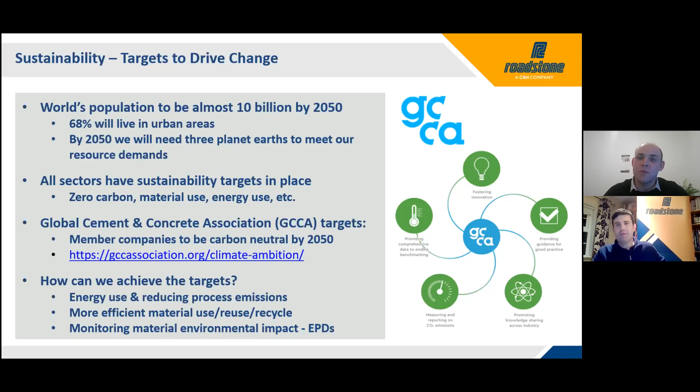And then to also achieve this, we need to monitor what our actual environmental impact is. We need to know of our products and the processes involved, what is the impact of them. For this, we can use EPDs, environmental product declarations.

So what are EPDs? They're a declaration of the life cycle analysis of a product, or the resource use indicators of that product. Unlike an eco label, which really just looks at the CO2 or the waste generation, the EPD covers everything. So it's your global warming, your CO2, your ozone, and then it's pretty much everything that's involved and the outputs of that material.

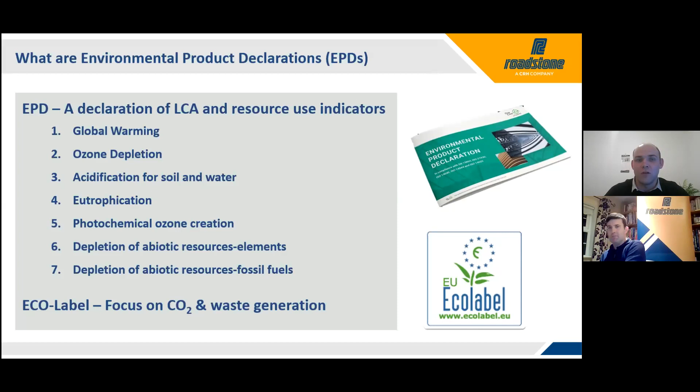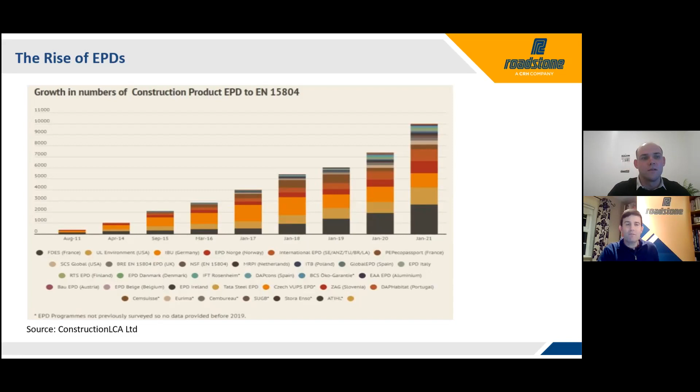So how do you actually go about developing an EPD? For the products you're looking at, you need to have 1 year's data collected. So you're looking at everything. So the materials that go into producing that product, the raw materials, the fuels involved in the processes, your electricity, the different energies you use, the waste you generate, the water you use.

And also now as well, you need to look at the life cycle in terms of the recarbonation during the life and then your wastes after life. Insignificant inputs aren't required, so the likes of where you're using reusable molds to create that product, you don't have to include them in your data. You use this data then to calculate your LCA.

Again, being a member of the GCCA, we have access to their EPD tool. There's also several other third-party EPD tools that can be used. So with these tools, they're set up that you input your data, and as long as your data input is correct, it calculates your full LCA for you.

You then have to engage with a third-party verifier and draft your EPD project report for the verifier. Typically then they might come back with some queries around your inputs and really ensure that your inputs are correct. Then you submit your EPD to the program operator for publication. So you're looking at your host platform. In Ireland, we have the Irish Green Building Council, the IGBC, which can act as a host platform, and there's also a European platform that can host your EPD.

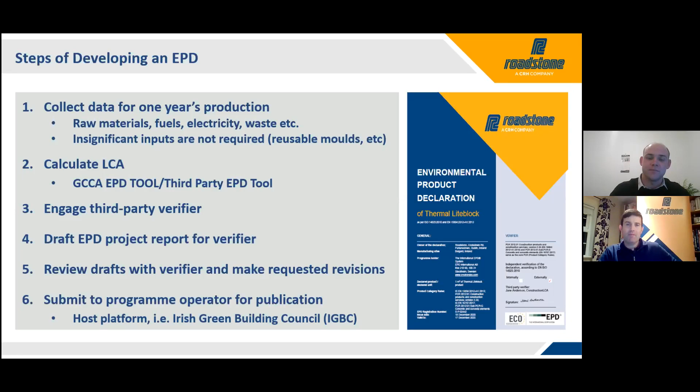Just a little bit more then on the life cycle stages required for the EPDs, what it actually is. So it's made up of 5 different stages. You've got A1 to A3, which is your product stage. So from a supplier's point of view, this is what we're concerned with. It's what we call the cradle to gate. So what's needed to produce that product and get it to our gate where it's ready to go to the customer. You then have the construction phase.

You have the operational phase, then C is the end of life stage, and then D, which is the loads beyond system boundaries. Up until 2019, to create your EPD, you just needed the cradle to gate, so the A1 to A3. Now you also have to include the end of life stage and the loads beyond the system boundary.

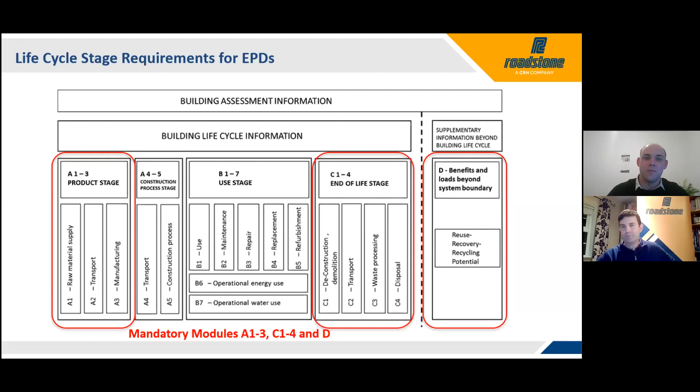Just looking at some of the key standards around creating EPDs, particularly those for cement and concrete. First of all, to create an EPD, you have to have a PCR. Your PCRs are your product category rules. And what they do is they ensure that when you're assessing or comparing two products of the same type of product from two different suppliers, that they were both assessed using the same method, that you're comparing apples to apples.

And to create an EPD, you have to have these PCRs in place. Well, they're well set up for the likes of cement and concrete. For other materials, the likes of asphalt or fill, there is still work on developing these PCRs, which will allow us to better develop our EPDs for the likes of asphalt and fill and other similar materials.

The key standard is EN 15804, which is your construction product PCR. You also then have 16908, which is for your cement and building lime, and 16757, which is for concrete and concrete elements. As I previously said, up to 2019, you just needed to have the product stage for EN 15804. This has now been revised.

It also includes a coexistence period of 3 years, and it also considers the end of life and the beyond system boundaries in the EPD calculation. There's also some additional mandatory indicators, such as the water use, the fossil fuels and gases associated with those, and how recarbonation is used during your operational phase and end of life for the product.

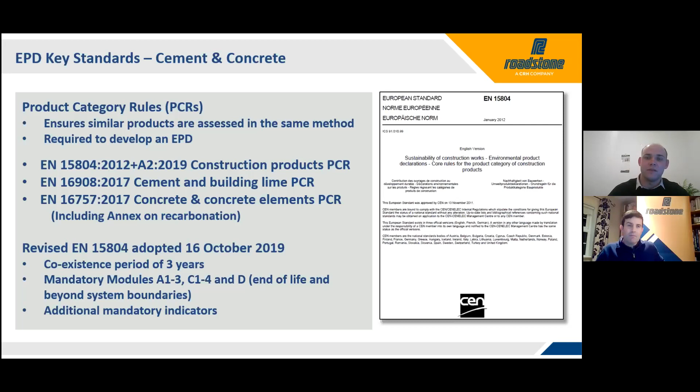So what are the advantages of EPDs for customers or for designers or specifiers? It's how we use them in schemes, such as the HPI, the Home Performance Index here in Ireland, which is a voluntary scheme for certification. If you have an EPD for your HPI, you can get a better score.

Similarly, Levels was developed by the European Commission, uses real life cycle analysis to allow optimization of your building and its design, and then how it's going to perform over the life. Again, EPDs are an advantage, and also the likes of LEED and BREEAM, where the type of scoring you get will depend on the number of EPDs you have. The type of EPD you use in these schemes will influence the scoring.

There's two different types mainly. You've got an industry-wide or a generic EPD. So this is where different suppliers will use the same EPD, one that has been developed for industry for that product. Then you have the product specific or type 3 EPD, which is one where when you use that product from a supplier, that EPD was developed by that supplier for that product. Generally, a type 3 EPD gives you double the points of a generic EPD.

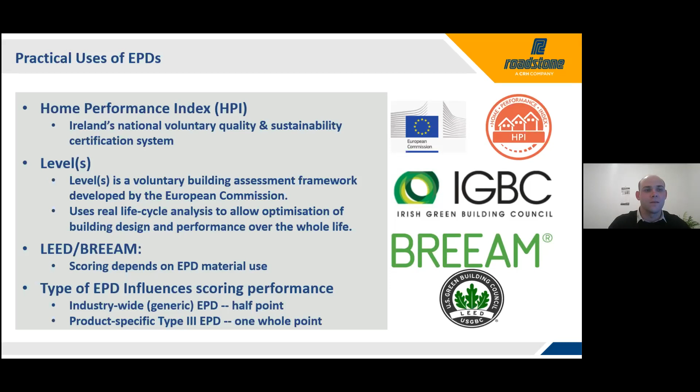A little bit more then on LEED and BREEAM. Both schemes work in a similar manner. They've got different rating systems. They're used during the design, construction, operation, maintenance phases of a project, based on the energies used, the products used, and then you've also got the likes of social aspects. For LEED, the design team collects the data and it's then assessed by the Green Building Council, the GBC. And LEED was actually the first scheme that used EPDs in their scoring system.

For BREEAM, it's slightly more scientific, based around how it scores and how the project is assessed, and licensed assessors look at the evidence to give that scoring. At the minute, for both these schemes, from a supplier's point of view, our influence is quite small for what we can do for these schemes. Generally, when we do get inquiries, it's just really looking for the upstream transport distances or the amount of recycled material that is used. To get the full advantage of these schemes and to really show you the sustainability impact, you need to be looking at the use of EPDs.

And again, for both these schemes, they're measurement tools. Typically, they don't come into play until during the construction phase or after a project is finished. So you're using it to score your sustainability then, whereas they don't actually influence the scoring. So you need to look at, again, how we can use the likes of EPDs in conjunction with BIM to look at your life cycle analysis as you actually design the project.

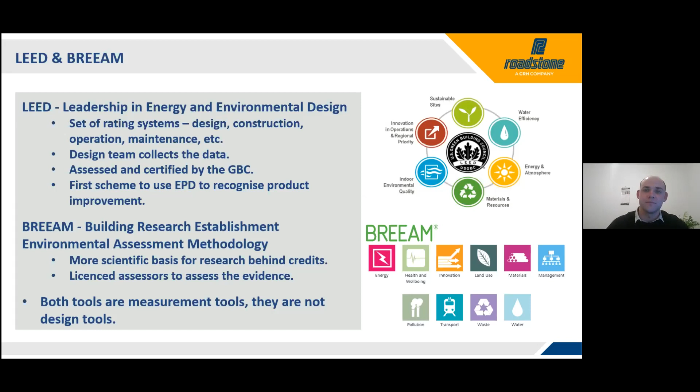Just moving on now, I'll talk a little bit about recycled materials in the construction industry, mainly for asphalt and concrete products. It's not disputed that there is a global reduction in aggregate resources, and from the figures I showed earlier on in the presentation, this is only going to increase. So we need to look at how we can improve the environmental impact of new construction products, while at the same time dealing with the environmental costs and environmental impact associated with waste products. So we need to look at how we can recycle these materials.

Recycled aggregates are produced from these wastes, whether they're byproducts or coming from waste sources. And there is an opportunity to increase the use of recycled aggregates, and they are a viable construction material. Of course, there are challenges associated with this. One of the key ones is acceptance of use by designers and suppliers. At the minute, there still is a bit of a stigma around the use of recycled materials: if you see or hear the word recycled, it's having the trust that it is going to have the same performance as the virgin material.

They are designed to have the same performance. Some characteristics may be slightly different, but they are still designed to get the performance of their virgin materials. And it's just overcoming, in a sense, gaining the trust in the use of these recycled materials. And also the standards that we currently use are limiting the use of recycled materials. And I'll look at a bit more of that in the upcoming slides.

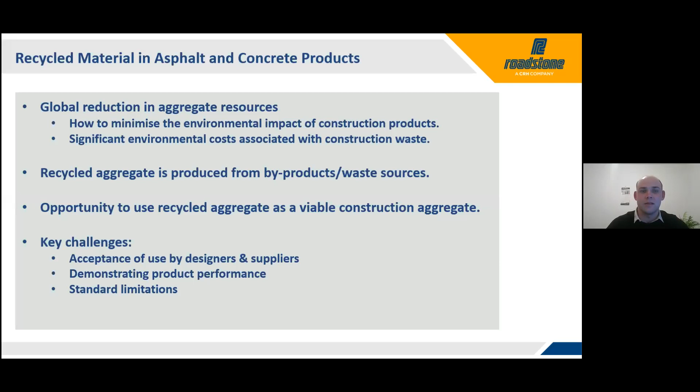So firstly, I want to look at the use of recycled materials in concrete, or recycled concrete aggregate, RCA. For using RCA, it's knowing the difference between construction and demolition waste, or C&D, and the RCA. C&D is all your waste. It's your concrete, your asphalt, masonry, tiles, steel. It's all that's coming off a site. Whereas recycled concrete aggregate is made up of only the concrete aspect of that waste. So to ensure that you are using recycled concrete aggregate, you need to have correct and well-maintained feedstock management to ensure you correctly and efficiently use that material.

Our colleagues in CRH in Europe are doing a lot of work in this area at the minute around C&D waste and how you can actually divide out the different wastes to reuse them. And even for recycled concrete aggregate, dividing up the materials that come from different strengths, so that you can divide them into low strength, medium strength, and high strength recycled materials, so that you can reuse them more efficiently. Also, there's work being done on material passports at the minute, which will be very beneficial for schemes such as this, because then you're going to know exactly where your products come from, what's in your product, and how it can be efficiently reused.

We have quite a large concrete research and development facility in Roadstone, and an area we've done a lot of work on in recent years is recycled aggregates. Some of the findings we've had: we can manufacture both coarse and fine RCA to comply with the standards. The RCA material strengths are suitable for use in concrete strength classes higher than C30/37. At the minute, we're limited to C30/37 or lower. And in higher strength classes, we can actually achieve coarse aggregate replacements of up to 40%. And also fine RCA can be used up to 10%.

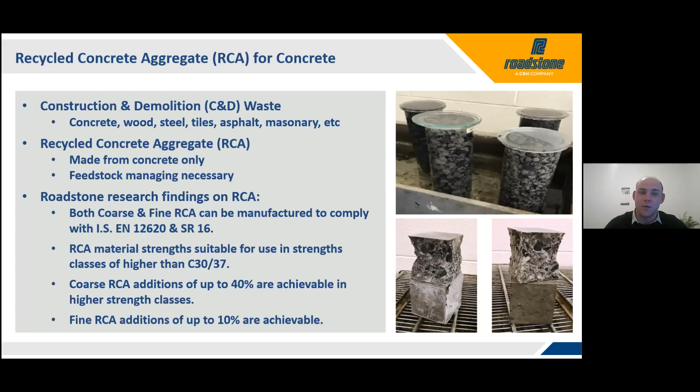As I said, one of the limitations around the use of recycled materials, especially in concrete, is the standards. EN 206 is the specification for ready mix concrete here in Ireland, and table E.2 in that standard gives maximum percentage replacement levels of coarse aggregate with RCA. At the minute, it's only the coarse aggregate portion that can be replaced with recycled material. The amount of recycled material you can use depends on the exposure classes. So for X0 concretes, which we typically call our lean mixes, up to a strength class of C20/25, you can have a maximum replacement level of 50%. For C25/30 up to C30/37, the maximum replacement level is 30%.

And for C32-40 or higher, you're not allowed to use RCA. At the minute, we consider our major cities and the type of structures currently being used and designed. High strength concrete of C32-40 or higher is becoming quite the norm.

So by being limited to C30-37 or lower, and the values on that, we are quite limited with how much recycled material we can use.

The use of RCA should be in agreement by all parties involved in a project, and as an alternative to this, they're limited to 5% RCA combined of all aggregates.

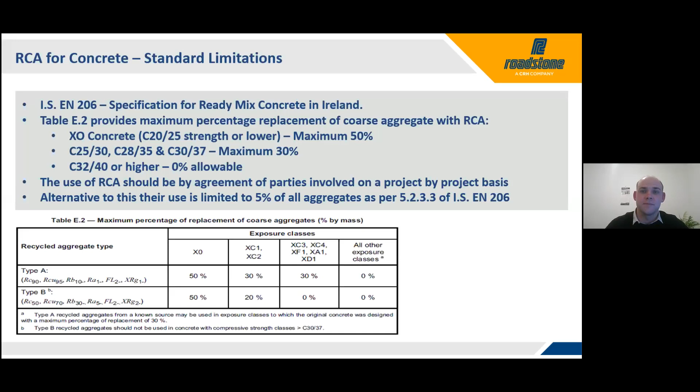Next, we have asphalt and how we can use recycled materials, also known as recycled asphalt pavement or RAP. Asphalt pavement is 100% recyclable, and it's actually one of the most recycled materials in the world.

I'll just give a link there to the European Asphalt Pavement Association. It's got some very interesting figures on the use of asphalt and recycled materials.

Because it's 100% recyclable, you can have savings on natural material use, the binder, and the fuel. So unlike concrete, where it can be reused as an aggregate, in asphalt you can actually also reuse it as the binder.

Because of this, we can actually reduce up to 40% of the environmental impact of the virgin mix. It gives equivalent performance to virgin mixes, and it can be batched using two different systems, a hot or cold batching system.

Typically for larger plants, you're going to be looking at a hot batching system. Roadstone have got RAP capabilities in 5 of our asphalt plants.

On the right hand side there, I've just given a picture of our Belgard asphalt plant. RAP is available in it using a hot batching system, and it is capable of batching up to 400 tonnes of asphalt per hour.

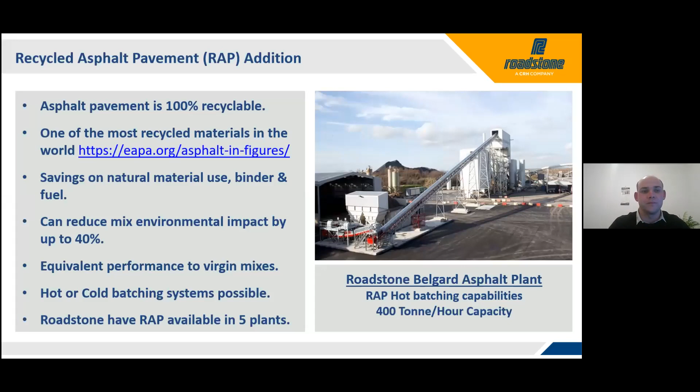Like concrete, the use of RAP in asphalt is limited by the standards. So for the TII specification for base and binder courses, up to 2015, you could use a maximum of 50% RAP. And since then, we've went backwards.

We're now with 30% RAP replacement as the maximum, and surface courses don't allow RAP to be used at all.

Currently in Europe, the normal is to use 50% RAP, and new plants are actually being designed to achieve up to 90% RAP, so we're replacing 90% of the virgin mix.

Like our concrete, we've got a large asphalt research and development facility located in Belgard, and there's a lot of extensive work that's been done there in the last couple of years, looking at RAP and how we can increase the RAP dosage in our mixes.

We're now doing trials in conjunction with the TII to look to increase this maximum RAP percentage. We've also done production trials ourselves in one of our locations, where we've used 70% RAP in our base and binder courses.

And 20% RAP in our surface courses for haul roads. Again, just showing that it is possible, and I suppose how the standards are holding back.

And it's something that goes not just for the likes of recycled materials in concrete or asphalt. A lot of the standards now, I suppose, are getting a little bit outdated in terms of the research that's gone on in the last 10 or 15 years in producing these low CO2, low environmental impact products.

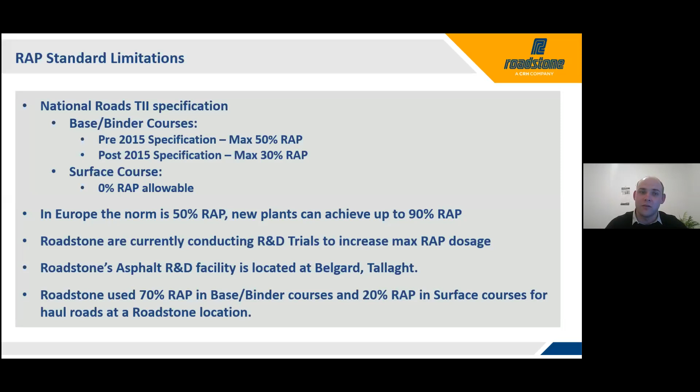And to meet both the long-term 2050 goals and even intermediate goals for the likes of 2025 or 2030, the standards will have to be adopted for this.

Just in relation to recycled material use, I just want to mention Article 27 and Article 28 from the European Community's Waste Directive. It's by no means an area I'm an expert in.

I just thought I would mention these to show that they are there, and how they relate to the use of recycled materials. So Article 27 looks at how a waste material can be classed as a byproduct, and Article 28 then looks

at how a waste material can be considered no longer to have environmental or human health impacts and can be reused. So just a couple of things that need to be kept in mind when we are looking at the use of recycled materials.

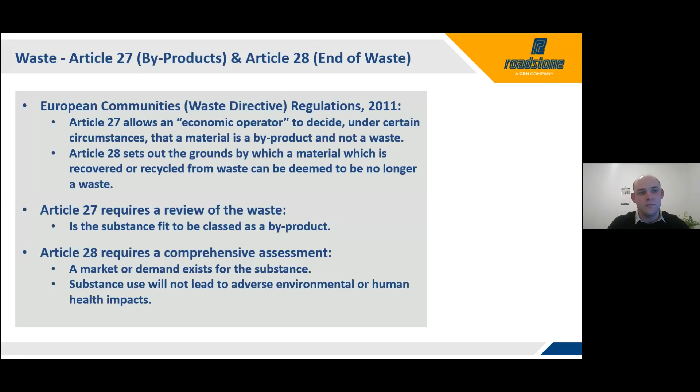I want to move on and look a little bit at research and innovation, and how we can use this to achieve sustainable solutions. It's an area we're currently doing a lot of work in, just like the rest of the construction industry throughout the world. We're looking at our products and the processes involved, and how we can reduce their environmental impact, such as using recycled material.

Using EPDs and LCA tools is quite beneficial here. It allows you to pinpoint where you can change to increase your sustainability. It's not just from a supplier's perspective - we need to be looking at research and innovation from a designer, specifier, and contractor's point of view too. For designers and specifiers, looking at what to specify, understanding what the material's LCA actually means and what its advantages are.

I'm going to put out a quote here. If you've heard me talk before, it's probably a quote you're getting sick of seeing. It's one I read very early on in my PhD, and it stood out to me - it's something I do think of from time to time, and for what we're moving into, it's very relevant. The paper is 'Cements of Yesterday and Today, Concrete of Tomorrow.' The quote is: contractors and owners have to realize that what is important is not the cost of one cubic meter of concrete, but rather the cost of one megapascal, or one year of life cycle, of a structure.

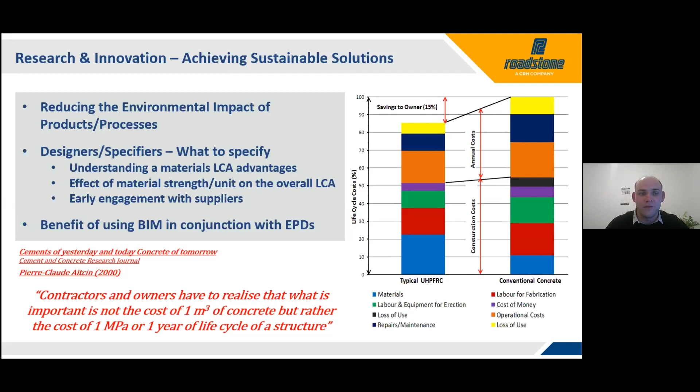In terms of research and innovation, I want to mention a couple of case studies of projects we've had recently. The first is, as Colin mentioned earlier, the Rose Fitzgerald Kennedy Bridge outside New Ross on the Barrow River, the N25 bypass, which recently opened last year. It's an 8-pier, 3-tower extradosed bridge, just under 900 meters in length.

Because of the low tower height associated with extradosed bridges, there's very high stress on the concrete, so you need a high strength concrete, plus long pumping distances, both horizontally and vertically. So you need a concrete that doesn't just achieve the strength, but also gives you this workability performance. The high strength concrete used was a C80/95, and we actually produced over 4,000 cubic meters of it.

It's a strength of concrete that's not normal in Ireland, and definitely not in the volumes we supplied. For a concrete of this strength, you're generally looking at importing or transporting aggregates long distances and using other special additions in your mix. By engaging with designers and the contractor early on, and doing a lot of research work, we were actually able to produce this high strength concrete at our plant local to the project, also using aggregates local to the plant. It was quite an achievement and quite a sustainable solution.

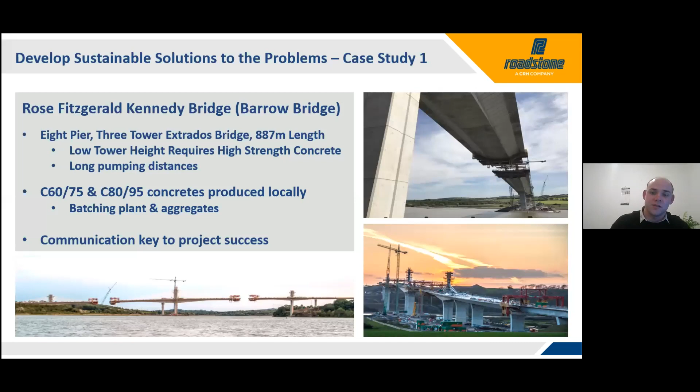The second one then is for an asphalt project at Dublin Airport Red Car Park, where the DAA needed to manage the stormwater at the facility, needed to be able to both drain the water and also store the water. And there was also a very challenging project schedule for this job.

For this, Roadstone came up with a solution of using DuraFlow and Permeabase. So we channel the rainwater through the porous asphalt, which is the DuraFlow. You can see in the picture how when water is poured on that material, it drains down through it. It then goes into the granular reservoir layer, which is your Permeabase. From this, it can flow to the lowest point in the system where it can be stored and also used as a water source if required.

We supplied over 62,000 square meters of pavement for this job. Again, it not just achieved the quality required in a challenging time frame, it also gave the required environmental performance. It was a sustainable solution to this problem.

So to move on from this now, I will hand you over to my colleague Colin Doyle, who will talk you through some of our SUDS products.

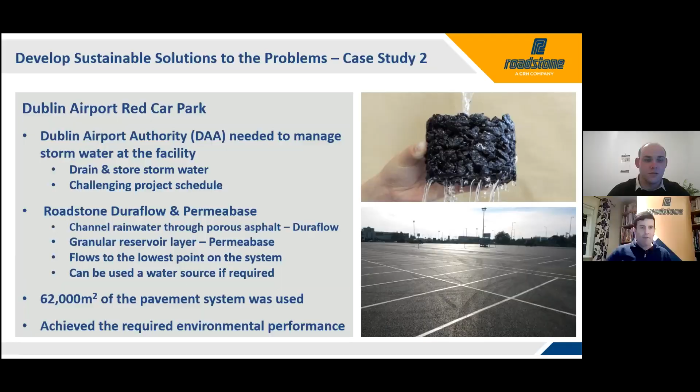Thanks to Will there. I think one figure that jumps out from Will's presentation is the fact that 78% of people will be living in urban areas in 2050. From a SUDS point of view, Will touched on SUDS there with permeable asphalt a minute ago. Going into the future, if we're going to accommodate that percentage of the population in urban areas, we'll have to allow our cities to expand in a more sustainable fashion than we have in the past. SUDS is, I suppose, sustainable urban drainage systems.

What I'm going to talk about here is permeable paving. Roadstone also have a permeable DuraFlow blacktop system, which Will outlined. And we're also working on a permeable concrete, ready-mix concrete system that we'd hope to have up and going in the coming years.

The drivers for SUDS are simple. It's climate change, the Water Framework Directive, and the fact that drained water or first flush water from rain events tends to be polluted, and it may go straight to rivers or overflow sewage plants, etc.

Another driver for SUDS is planning policy statements. Different county councils are driving SUDS in different ways, depending on what part of the country you're in. It seems to be more relevant in Dublin at the moment, so SUDS is nearly mandatory in the Dublin area. The different types of SUDS is open to interpretation, but SUDS itself is mandatory. As we go down the country, it's becoming more and more relevant, along with local authority plans with regard to sustainable urban drainage.

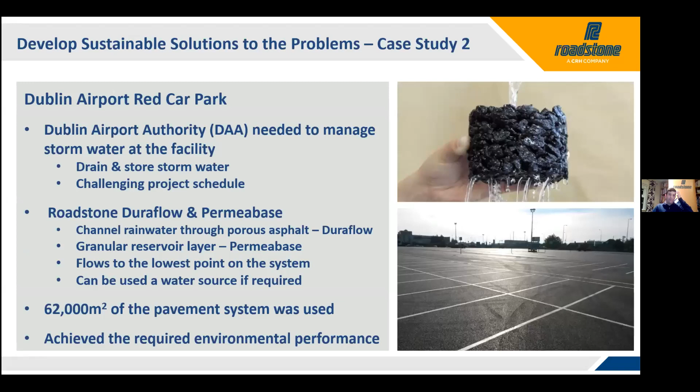Benefits of SUDS are very simple: reduced flood risk, improved water quality, increased biodiversity, because SUDS permeable areas such as swales and wetlands tend to enhance biodiversity, and increased levels of green infrastructure. It creates better places to live.

It creates an idea of engagement with local communities. I suppose this is becoming a bigger issue since so many of us are working from home now. Maybe we're looking at our local areas in a different way than before, when we were rushing in and out of work, or rushing to Dublin, or rushing back, or rushing into Cork, etc.

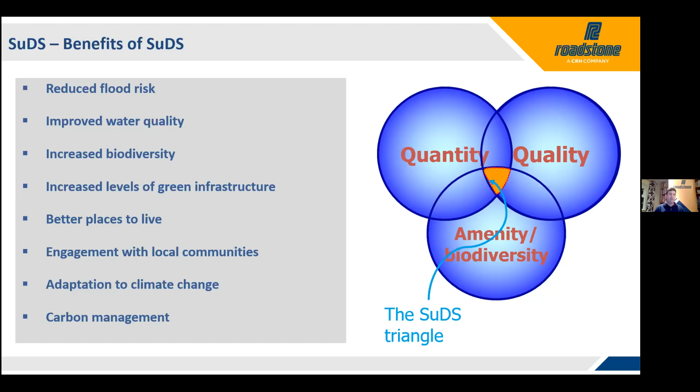It's about adaptation to climate change and carbon management, be it in wetland areas, etc. We hear a lot from Bord na Móna, I suppose, recently with regard to stopping the burning of fossil fuels and managing the bogland areas.

I suppose the main SUDS paving components are what we look at. We're really into the engineering of SUDS rather than the biodiversity end of SUDS, so we're into engineering SUDS into the built environment. In Roadstone, we're very strong with regard to engineering background - anything we do has an engineering background to it. So when we offer a SUDS or permeable pavement system, we offer the engineering backup in the background to make sure the system works properly.

We just look at the main components to it. The sustainable urban drainage system on a permeable paving are really the paving blocks themselves, which are simple concrete blocks that allow water to ingress. Underneath we have a number of stone materials or crushed rock materials without any fines to allow the water to permeate down, either through an Inbitex, which is a non-woven geotextile that promotes microbial growth and treats the water as it goes through.

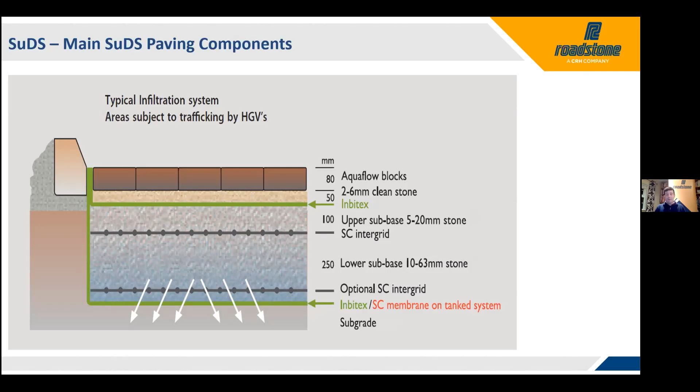You'll also see SC intergrid, which allows structural reinforcement within the stone itself, offering reinforcement to the whole structure, much the same way as steel reinforces ready-mix concrete. So that's what we're looking at with regard to stone build-up.

With Roadstone, we're very strong on design. We think that because we offer a product, we should have a design background, and we should offer the customer something to enable them to make the system work properly. So we have a design process in place.

A properly designed or constructed SUDS system will allow you to reduce the use of virgin materials, because you'll be designing the build-up to make sure you're using the least amount of virgin materials. To do this, you require site plans in AutoCAD format, including proposed levels and drainage strategy.

You may have a larger site, and decide you're putting HGVs on one end but only pedestrian traffic on the other. You may want one end of the site to allow water to permeate or percolate to ground, while the other end holds the water for delayed discharge, or uses the water in a swale or biodiversity area.

When you design something, a design engineer takes responsibility for the permeable paving design, and issues a site-specific permeable paving design, including construction depths, invert levels, restraints, drainage, and any other design elements. So it's a fully designed permeable paving system, or a fully designed SUDS system.

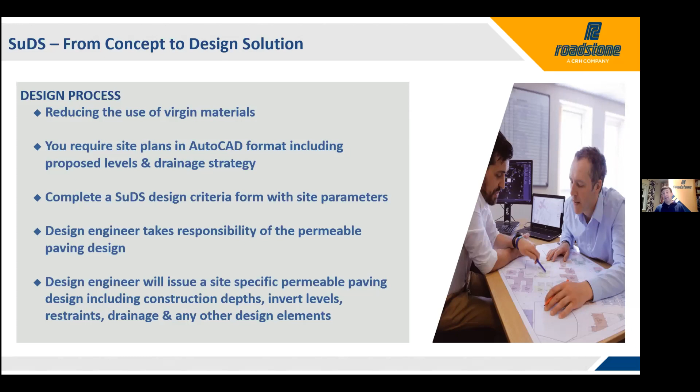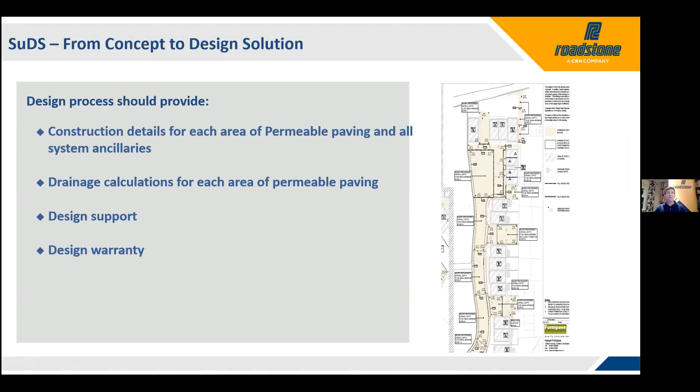The design process will provide the construction details for each permeable area, a full set of drawings, drainage calculations for each permeable area, and design support and design warranty. Our process is that we offer a product to the customer, and we sit behind it, and we sit behind the engineering behind it.

The design process should also look at different designs for loading. As we talked about earlier, is it going to need HGVs? Is it going to be cars or pedestrians? What's the rainfall data in the area? Is it an area that gets high rain?

Each design is a comprehensive bespoke permeable paving design, bespoke to that particular site. Each site is different. We'd have generic designs within our brochures for each different area, but when we take on a large development, we do a comprehensive bespoke permeable paving design.

Design service and materials throughout would obviously have the Roadstone warranty, and the design itself is covered by professional indemnity insurance.

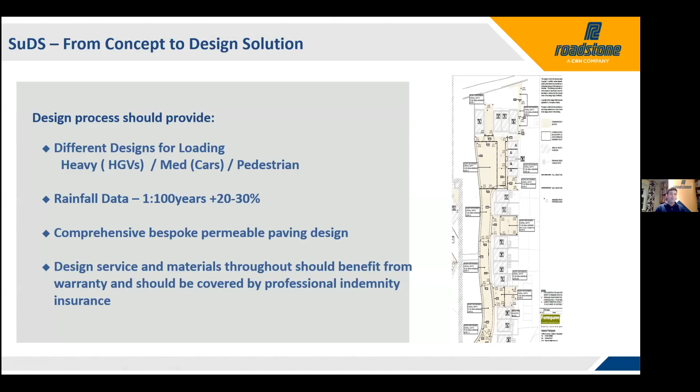If we look at a simple comparison, permeable paving is a simple process. We look at impermeable paving as opposed to permeable paving. It's very simple: one allows the water through, one doesn't allow the water through.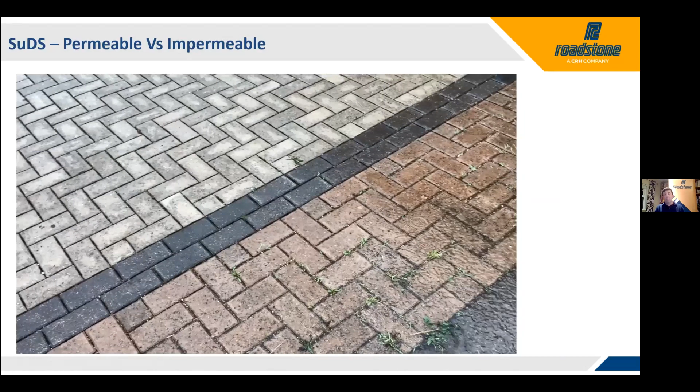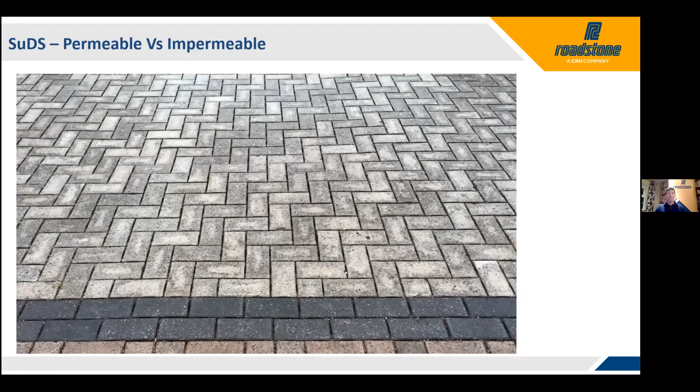By letting the water through a paved area, you minimize the amount of growth in that area. You minimize the hazard of trips, slips and falls. You minimize the chances of ice developing on that paved surface.

We're just going to look at two or three case studies with regard to permeable paving design. Everyone will know a kind of horror story - permeable paving in a supermarket that ended up being taken up two or three years later. We'd say it's not down to the permeable paving itself, it's down to the way it was designed. That's why we would always push getting a professional design done.

So it was ML machine-laid paving blocks and Inbitex membrane, a non-woven geotextile that treats the water as it goes through, in a 350 mil deep sub-base, which was a specification graded stone with 30% voids. All our graded stone has to have 30% voids, even under compaction, achieved by using crushed stone rather than a sand product, to maximize storage, over an SC membrane to form a tank system.

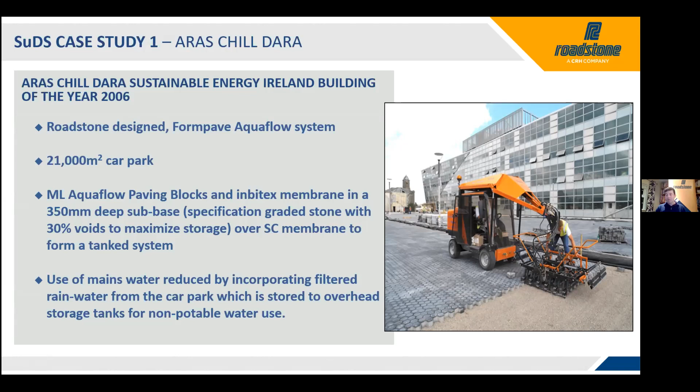16 years on, there's actually a new car park, 5,000 square metres, just up at the top left-hand side of that picture. It partially drains onto the permeable paving and is accommodated by the existing drainage. Kildare County Council report there's no standing water in the car park, even after major rain events. So the system is still working 16 years on, and there hasn't been any significant maintenance done on the product.

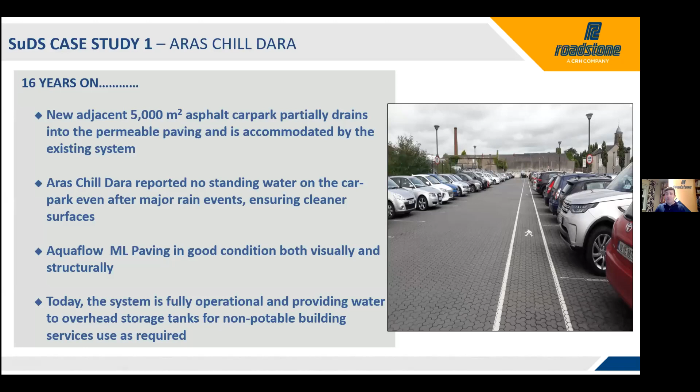The Aquaflow ML pavement is in good condition, visually and structurally. Today the system is fully operational, providing water to overhead storage tanks for non-potable building services use as required. The grit between the paving bricks is gone now, so that will have to be relaid, so you'll see slight movement as you drive over the pavement, but the pavement is a block of concrete. It's doing everything it's supposed to do, and it's still working because it was designed properly and because everyone stood by the design components of the job.

So the second case study is a more modern one, the Mary Geary Creche in Carrigtwohill, Cork. This is a very interesting permeable paving project because it was about 500 square metres, or 51 or 52 parking spaces. For the most part, the car park was in asphalt.

It was a full complimentary SUDS design carried out by Roadstone's design team with our colleagues in Forterra in the UK. Roof water had to be accommodated within the SUDS system, because the only discharge the creche had was the sewage. The engineer decided early on that he wasn't going to discharge two acres of surface water to sewage and overpower the sewage system that was going for treatment.

So he made the call early on. Ray Keane and Associates decided early on that we were going to try to design the system to go straight to ground. That's a very brave thing to decide early on, and we had a lot of interaction with the engineering company at the start. So roof water had to be accommodated within the SUDS system, and all rainwater from the two acre site is treated and discharged to ground.

So even though some of the car park area, the parking spots, is permeable, the tarmac macadam was not permeable, the roof was not permeable, the concrete paths were not permeable, and the Indian sandstone at the front was not permeable. Only the car parking spaces were permeable, so they had to accommodate all the water from the site and discharge it to ground.

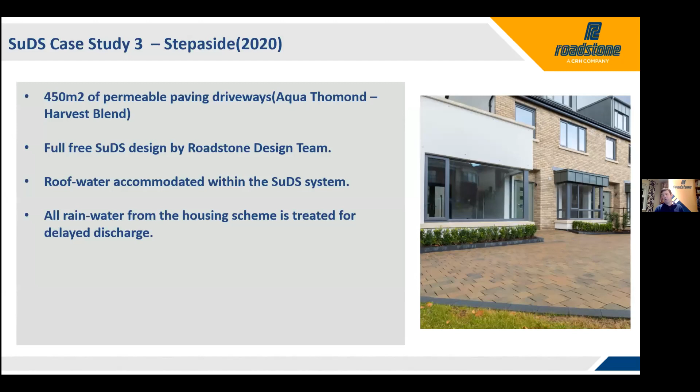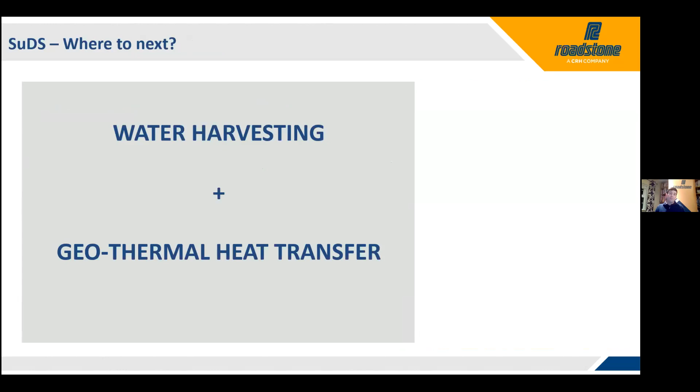When it comes to SUDS, there's a lot of straight permeable pavement, but there's a lot of real interesting things going on in constructed permeable systems at the minute. There's a big push into water harvesting and even some push in the UK into geothermal heat transfer systems. So with regard to rainwater, we see the drawing of rainwater harvesting. Instead of letting your water go to ground underneath your paving or driveway, you could take the water and put it into your rain harvesting tank for use as grey water within the building. Now, if you're doing a retrofit system with your paving, it's not as effective as if it's designed into the building at the start.

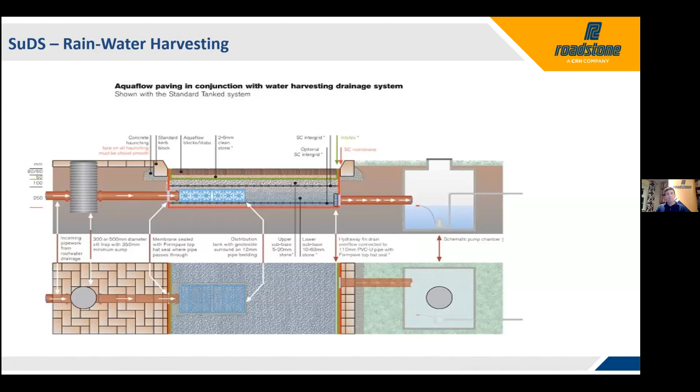So we're seeing more and more of these. You'll see the little blue box within the paving system. That's our distribution tank from our roof water. Rainwater harvesting has been proven in the UK to reduce household requirements by up to 50%. It stores water from roofs, impermeable surfaces and driveways, etc., and can beat the hosepipe ban, which is huge in the UK. They tend to get very dry summers, so there tends to be a hosepipe ban in place.

And the tank system will hold 1 cubic meter for every 10 meters of paving with a 350 sub-base depth, which would be a typical enough build-up of permeable stone under a permeable pavement system. You can retrofit for exterior use, for car washing or gardens, etc. But for new builds, you can use it as grey water for flushing toilets, central heating, washing machines, etc. And the pump chamber can be installed within the driveway itself. So it gets very innovative as you go through the systems themselves.

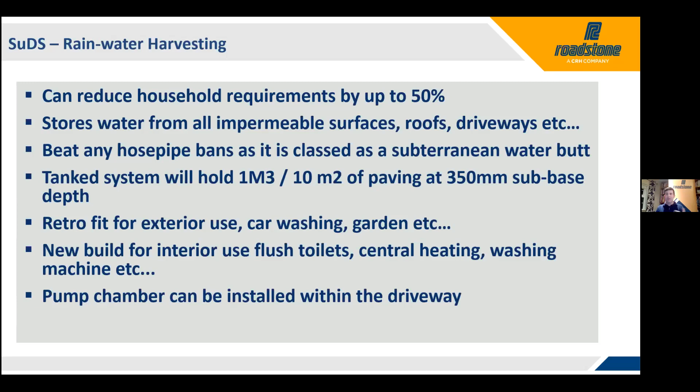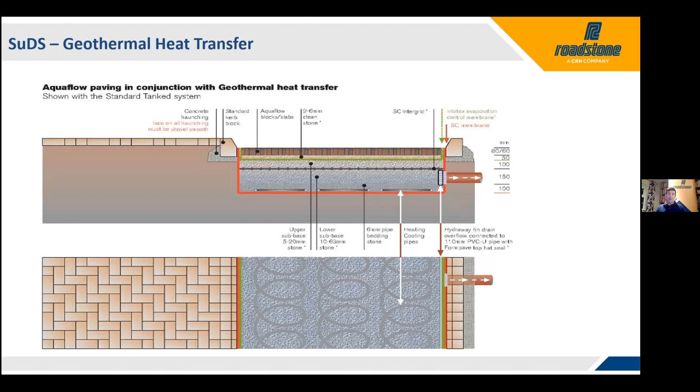Now, the last one with regard to SUDS paving systems is geothermal heat transfer. This is somewhat in its infancy in the UK, and it's something that we're definitely looking at over here. It's where the heating and cooling coils are within the permeable paving, and then heat is transferred back through the house in the same way as an air to water heat pump. So these are new systems coming online to deal with SUDS and to give further benefits in the SUDS system.